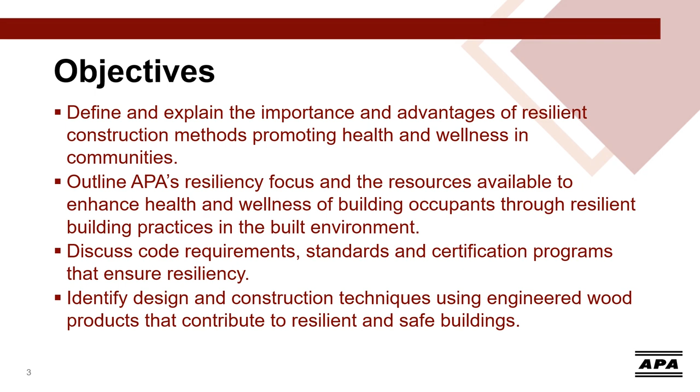So for today's objectives, we're going to be looking at defining and explaining the importance and advantages of resilient construction methods promoting health and wellness in communities. We're going to look at outline APA's resiliency focus. We're going to discuss code requirements, standards, and certification programs, and identify design and construction techniques using engineered wood products.

We're going to start with the why. Everyone knows today that extreme weather conditions in various parts of the world are the result of climate change and global warming. It's not just the number of heat waves, heavy rainfall, and major hurricanes that have increased in the world, but the strength and intensity of these events has increased considerably as well.

Architects, engineers, and builders are at the forefront of going beyond existing design practices. They are using innovative strategies to promote structural sustainability and safeguard occupants. Various strategies, such as utilizing durable and low-carbon materials, incorporating passive cooling techniques, and integrating nature-based solutions.

Investors are aligning their portfolios with sustainability goals. Resiliency includes energy efficiency, which the codes are mandating. In fact, energy efficiency is one of the top codes and the biggest priorities to incorporate into new homes.

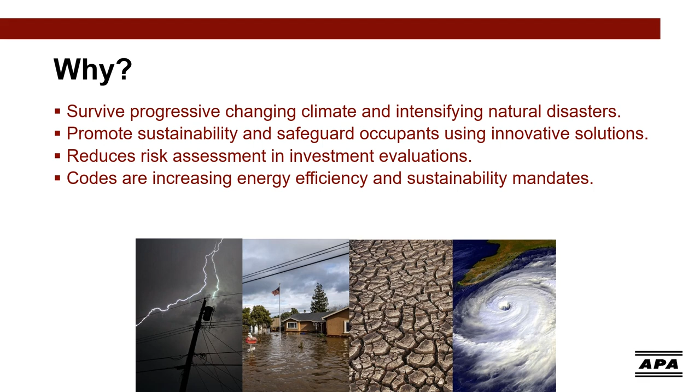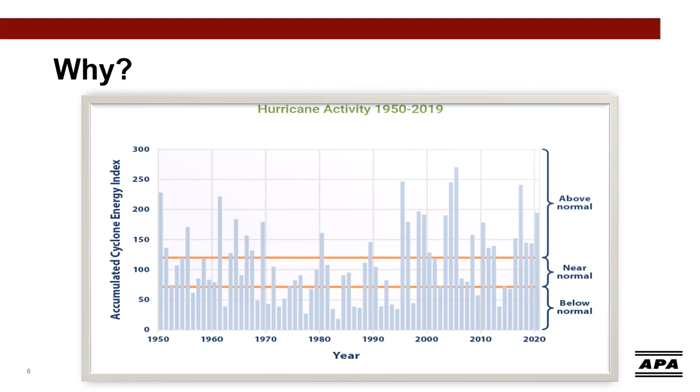Looking at hurricane strength and frequency over time, you can see that it has increased in strength and intensity since the mid-1990s. This is a pretty telling graph. It's very interesting.

So now that we've talked about the why of resiliency and why we're paying attention to it as APA, let's talk about APA's definition of resiliency.

So APA's definition of resiliency is the ability to design and construct buildings that can withstand and recover from severe wind events, seismic activities, fire, and floods while promoting sustainability and energy efficiency, utilizing engineered wood products. This is achieved through APA's 4 resiliency pillars: structural resilience, hazard mitigation, sustainability and stewardship, and energy efficiency.

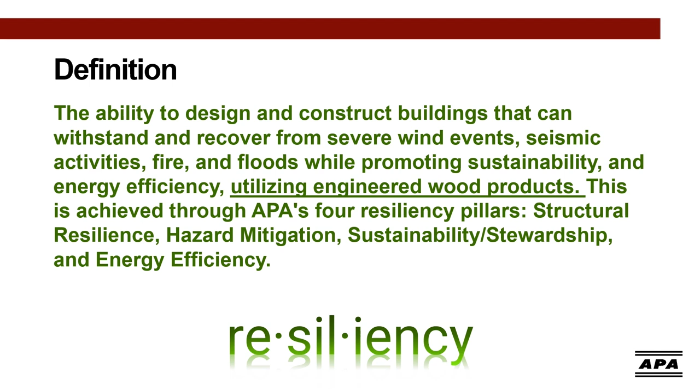Now that we've talked about the definition, we're going to move on to talking about the 4 key pillars that APA sees as part of our definition of resiliency.

So as communities worldwide have been struggling with the effects of climate change, resiliency is becoming more and more important and a more prominent topic when we talk about codes, code development, and building of buildings and homes. Our resiliency pillars include the following.

1, structural. Structural resiliency is very important. Hazard mitigation, making sure that the building can withstand fire and floods where appropriate. Sustainability and stewardship, making sure that we're doing sustainable items or putting sustainability policies in place for the built environment. And energy efficiency, a core piece of a solid resiliency plan to make sure the building is energy efficient and survivable after a major disaster.

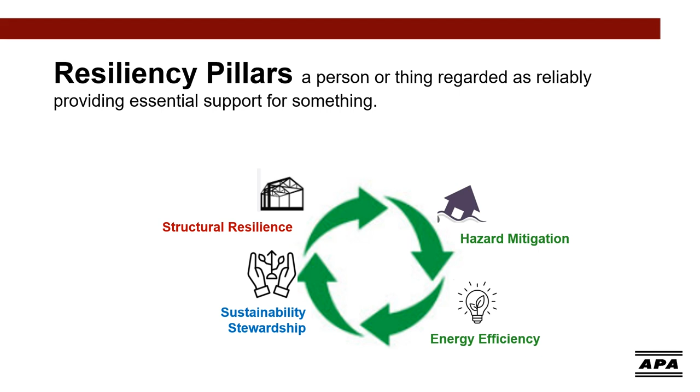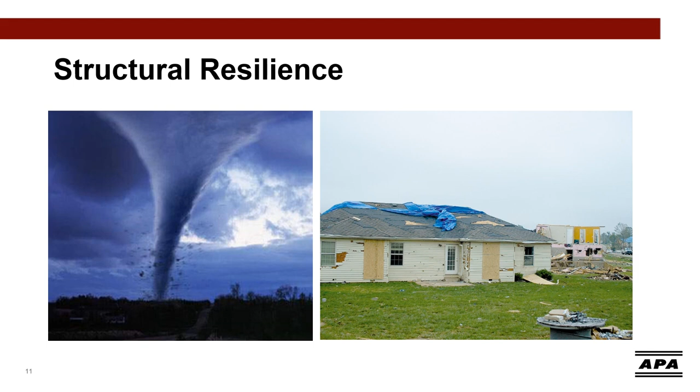So first today, we're going to talk about structural resilience and the importance of a structurally resilient structure during high wind and seismic events. So the key to structural resilience is promoting resilient, high-performing buildings that are capable of withstanding severe wind events. Seismic resilience is advocating for high-performance seismic design and construction of new homes and buildings.

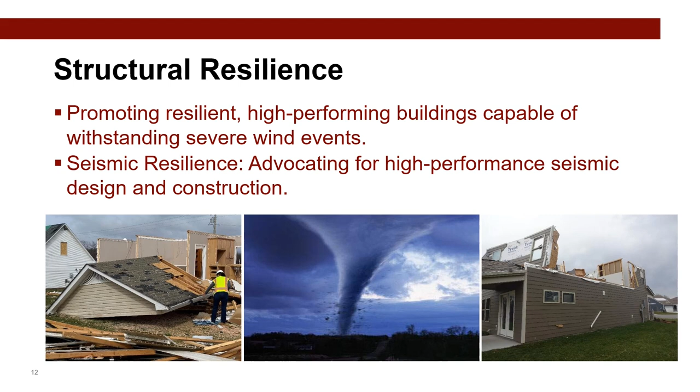So first, we're going to talk about high wind. And APA has several resources for this, and we'll talk more about them later on in APA's resources as well. But we have brace for high wind events and maximizing wall bracing using wood structural panels for continuously sheathed walls. And on the seismic side, we'll talk about wall bracing for seismic.

We're also going to talk about force transfer around openings. That's a solution that APA has for seismic. And weights of materials come into seismic design as well, where wood is typically a lighter construction product than some other competitive products on the market.

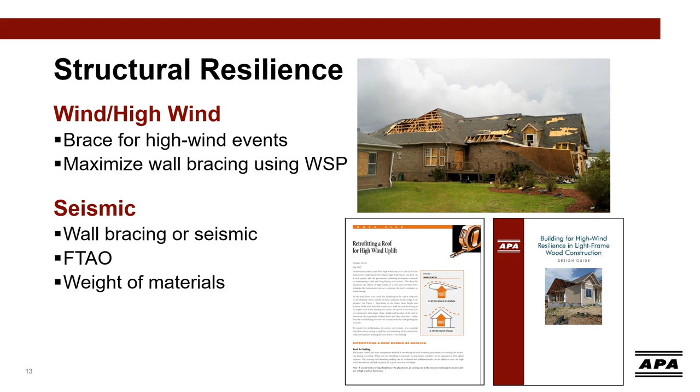We also see the importance of structural resiliency come up in different programs around the country. One of them is HUD, so they have some guidance for continuously sheathed homes in their community resilience toolkit, as well as HUD's resiliency guide for wind, which basically cites that a complete wrap of OSB or plywood, we call it wood structural panel in the industry, on the exterior, is recommended to make sure that you can withstand the wind pressures needed and design a more resilient structure.

The other program is Fortified. Fortified has different programs at different levels, but their gold program deals heavily with protection from wind, with fully sheathed homes and other methods that can be utilized to increase the resiliency of the building for high wind events.

So when we talk about hazard mitigation, we're going to talk about structural fire first. To be straightforward, AWC, the American Wood Council, takes the lead on structural and construction fire issues. APA references their resources. This is the way the wood industry and our partners utilize each other's expertise.

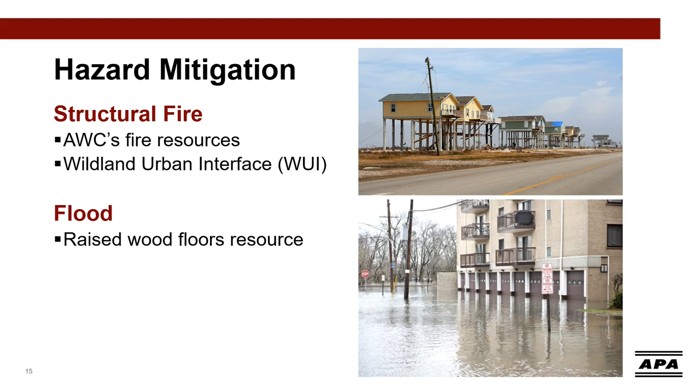Here are a couple resources from the American Wood Council on structural fire. You can go to constructionfiresafety.org, and it'll give you a 5-step best practices. They also produce the fire design specification for wood construction guide as well.

APA has several resources for flood and raised wood floors. In this case, a raised wood floor case study for Cooper Homes. You can also find the raised wood floor design guide that we have. It was a big promotion in the Southeast after hurricane damage and floods came through. Some foundations down there have flood dampers and stuff like that that allow the building to withstand floods in its direct area.

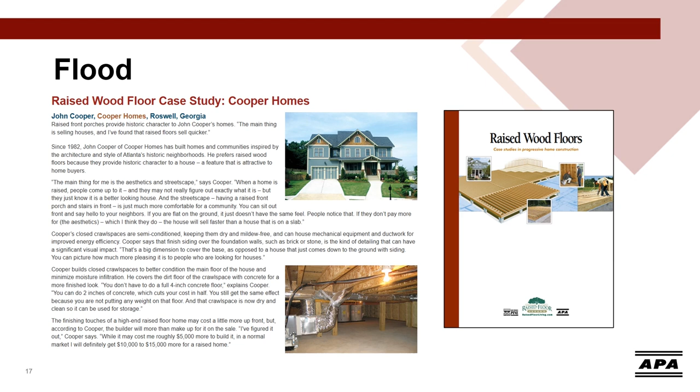Starting in the late 80s and early 90s, this movement towards sustainable structures began. Green building programs created a quantitative way to evaluate buildings' environmental impact and sustainability. Most recently, we've seen a shift in focus towards carbon accounting and the creation of Architecture 2030, the Carbon Leadership Forum, and SE 2050, all focused on decreasing carbon emissions. Now there's a high priority to develop resilient structures against hazards, but also to allow those structures to stay habitable when services are severed and occupants are still there.

Green verification reports are becoming more common. APA's green verification reports help building officials and design professionals determine a product's eligibility for points under different green programs. APA issues these reports to document the compliance of engineered wood products manufactured under a quality program audited by APA to specific international, national, or industry recognized green building standards.

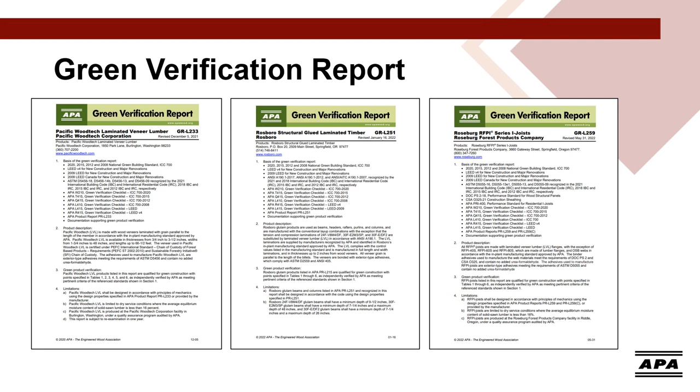Life cycle analysis, called LCAs, and environmental product declarations, called EPDs, are becoming more and more common and are becoming required in some areas of the country for construction. As we move forward and more attention is paid to sustainability, carbon, and embodied carbon, both from a codes perspective and a policy perspective, you'll see more discussion around LCAs and EPDs. The American Wood Council is charged with maintaining a database for EPDs and getting them online with LCAs as well. This information will be used in future programs in carbon accounting, as well as embodied carbon calculation programs that will be coming forth in the next several years.

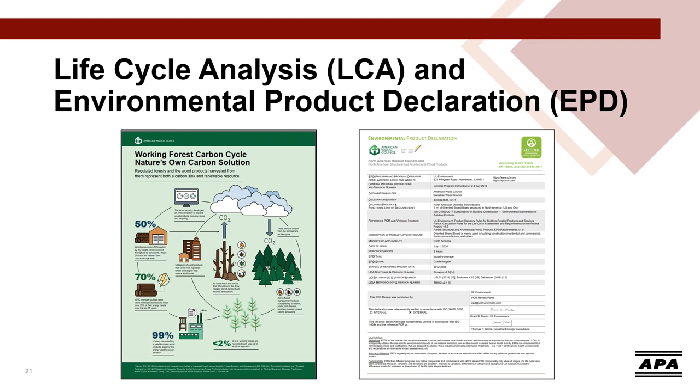Energy codes are becoming increasingly important in resilient structures. Part of it is we want to improve energy efficiency and support cost-effective updates to energy codes and policies. Another part is survivability and the ability to maintain livable temperatures for several days without energization to the house, electric, gas, or other means of producing energy. Another part is high energy performance, ensuring we have high energy performance in our structures today through well-insulated thermal envelopes that can support life and temperatures.

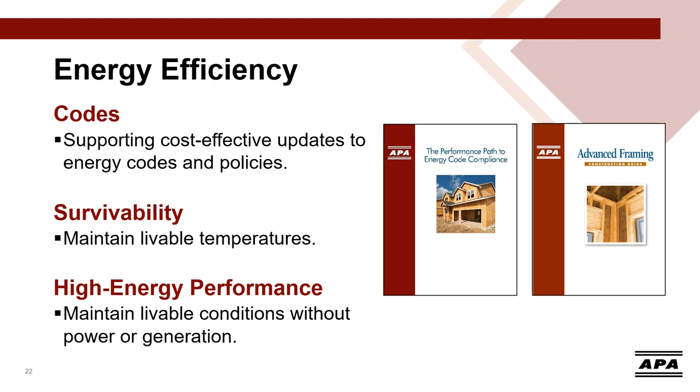APA has developed and is developing more resources on energy efficiency. APA's performance-based energy code publication, originally developed in 2016 and revised this year in 2024, is designed to be a guide to start conversations between builders, energy professionals, or designers about material and equipment options that can be utilized in the performance pathway of the energy codes. All homes have to be specifically modeled to that home design and site address, but it gives a starting point for discussions about if I change my walls, what's my impact on energy efficiency? Or if I want to put better windows in or a different heating system, what advantages might I see as the builder?

Performance-based energy code is essentially about looking at all the pieces of the home. Different from the prescriptive path that focuses on a set table of R values in the prescriptive code, it's kind of just a recipe. The performance path looks at putting insulation where it makes the most sense for your most value, and looking at other efficiencies within the home, whether it be windows, tight air leakage, tight HVAC equipment, high efficacy lighting. It takes the entire home as it sits into consideration versus just a checklist approach to energy efficiency.

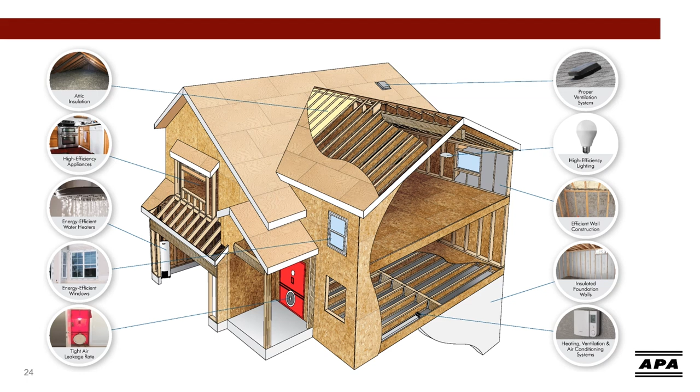Survivability is a big part of where the energy efficiency portion of resiliency comes from. Because as we've had more and more storm events, we've also had warmer weather or colder weather in some areas of the country due to climate change. And people need to be able to have survivability in their home for a few days without power generation or power to the home.

And there are several different programs that talk about the specificity of what that should be. ICC has some, DOE, Department of Energy, has some, but they talk about different survivability aspects. And one of the things that they look at is additional insulation, air sealing, preheating and cooling, and phase change materials as part of the product of survivability. We look at it from purely an energy efficiency standpoint and making sure that we have thermal comfort by having a well-insulated building thermal envelope.

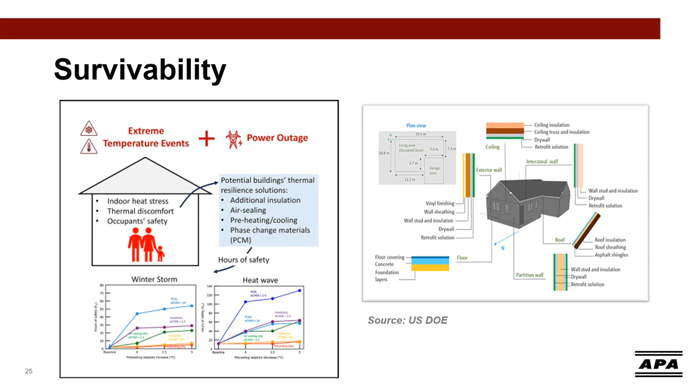And some of these programs have incentives for the builders. There are federal tax credits available currently of $2,500 per home for Energy Star version 3.2. There are also federal tax credits available of $5,000 per home for DOE's Net Zero Energy Ready Homes program. And there are multiple utility incentives and state programs, depending on your local state or utility, that vary anywhere from $200 to $2,800 per home. And some incentivize different insulation products, as well as different furnaces, thermostats, and HVAC equipment in general.

There are also rebate incentives to the homeowner through federal tax credits such as the Energy Efficiency Home Improvement Tax Credit and the Residential Clean Energy Tax Credit. There are multiple state utility incentives, state and local energy code adoption incentives as well, and other code and standards adoptions that are locally based that can provide rebates to the homeowner as well.

And with that, we finished up our resiliency pillars portion of today's presentation. And I'm now going to pass the presentation over to Stephanie Rees to talk about APA resources. We're now about halfway through, and we're going to change it up a little bit, and I'm going to be speaking to us. So if we look at the agenda, we're going to discuss the implementation of resilient methods in construction and how APA's resources can help accomplish this.

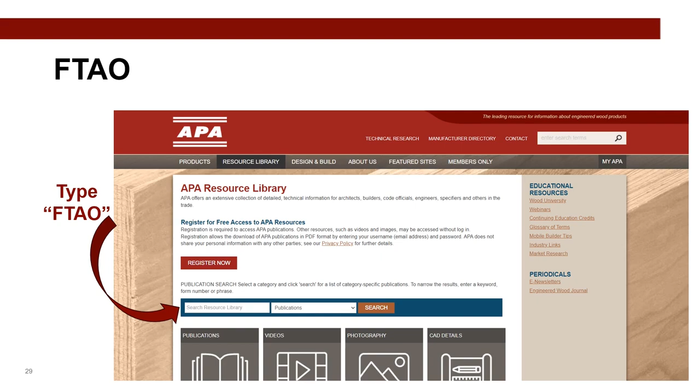Also, on our home page, in our Design and Build drop-down, under Design Solutions, you can find more resources about FTAO, like our calculator and a webinar about the calculator's use and explanation of the methodology for designing more flexibility in shear walls. As wood frame construction is continuously evolving, designers in many parts of the U.S. are optimizing resilient and sustainable design solutions that require the understanding of force transfer between elements in the lateral load resisting system. And using renewable sources like wood structural panels to accomplish these load path transfer options is a great way to meet sustainability goals.

Also, there are case studies and a YouTube video here that conducts an interview with a developer that explained how a 120-unit apartment building in California was value engineered and determined that a switch to I-joist compatible glulam, double-sided wood structural panel portal frames, and shear walls using the FTAO analysis got the project within budget while addressing the seismic loads.

And if I can just reiterate, like the case study shows, shear walls designed with force transfer around openings offer advantages compared to other types of shear wall design, like more flexibility, more versatility, because designing with the FTAO allows for the use of narrower wall segments while meeting the required height to width ratios, and a high likelihood that fewer hold downs will be required.

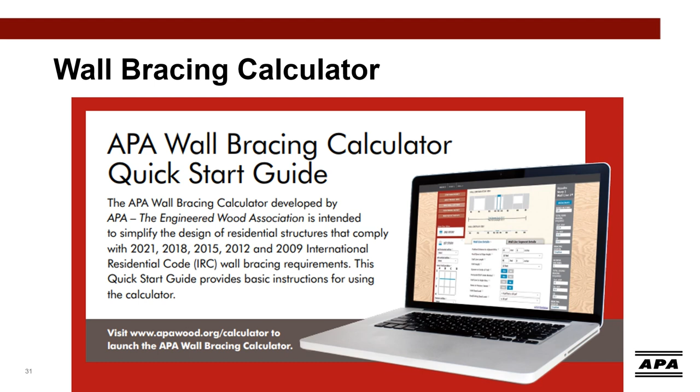Advanced framing method is another solution to incorporate resiliency in construction. Using continuous wood structural panel sheathing supported at 24 inches on center framing allows builders a cost-effective system that will produce more energy efficiency by allowing deeper wall cavities for insulation, and does not compromise the strength or durability of the structure. Less material and lower labor costs than conventionally framed homes, advanced framing techniques are more resource efficient.

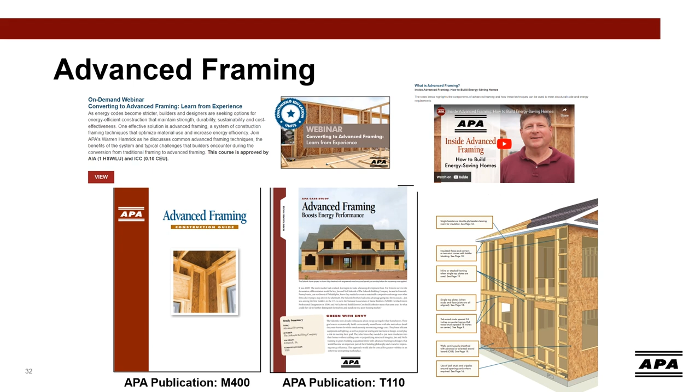APA has several publications, CAD details, case studies, and a webinar that discusses advanced framing techniques, the benefits, and challenges that builders encounter during the conversion from traditional framing to advanced framing. The left image is our advanced framing publication you can download from our website, and the picture on the right demonstrates how properly sizing and minimizing framing material is conserving cost and resources while aligning those framing members optimizes load path continuity and enhances structural integrity.

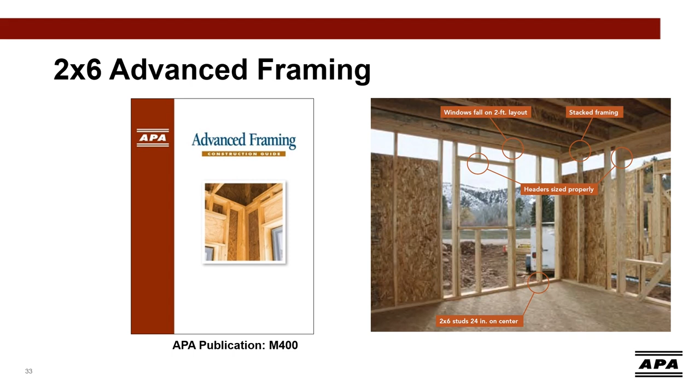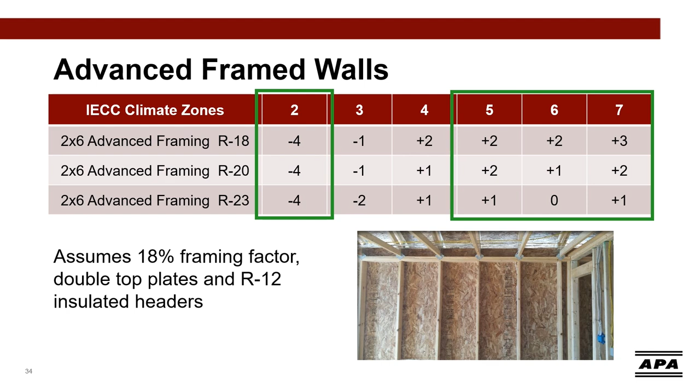Over a 10 to 13 year period, APA followed storms and created individual storm reports that looked at the storm's damage and noted the patterns in those failures. We then identified those common first failure points and determined a threshold that we would base and develop our Building for High-Wind Resilience in Light-Frame Wood Construction Guide. Now, this guide creates a framework to improve overall performance in the structural shell and focuses on good connection details to tie together exterior walls, roofs, and floors.

We also have a webinar that follows the load path described and shows many of those failure points from each storm and how they should be mitigated either through strengthening or just simply proper installation of what was specified.

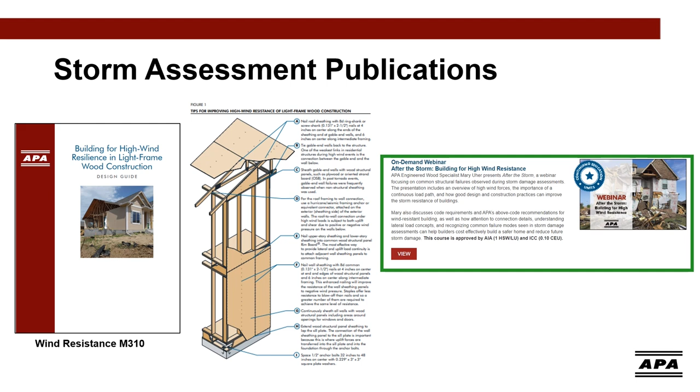The idea that less is more is a sustainable way of construction that can help reduce our environmental impact by conserving resources, using light frame engineered wood products that are generally more straight, further reducing waste, using mass timber like glulam and cross-laminated timber, or CLT, in lieu of concrete and steel that tends to be more labor and carbon intensive.

Biophilic design can improve human well-being by creating healthy, inspiring environments. Exposing the structure when the program allows for it reduces unnecessary materials and highlights the raw structure, and in some cases can become a learning tool. And again, using advanced framing technique meets sustainability goals.

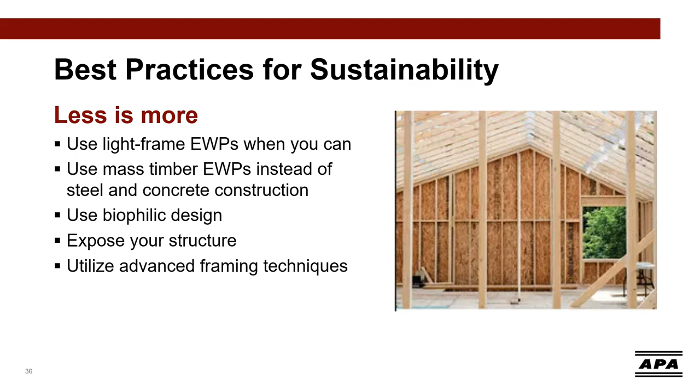I mentioned the case study already, but here's two buildings, one 4 stories over 1 and the other 2 stories over 1, that utilize wood podium rather than a traditional concrete podium. Again, these case studies highlight the following benefits like fewer trades on site, less mobilization time, fewer construction delays, improved framing efficiency, easier field modifications, decreased mass for lateral design, etc. Again, less materials from an embodied carbon superior material equals a sustainability win for projects like these.

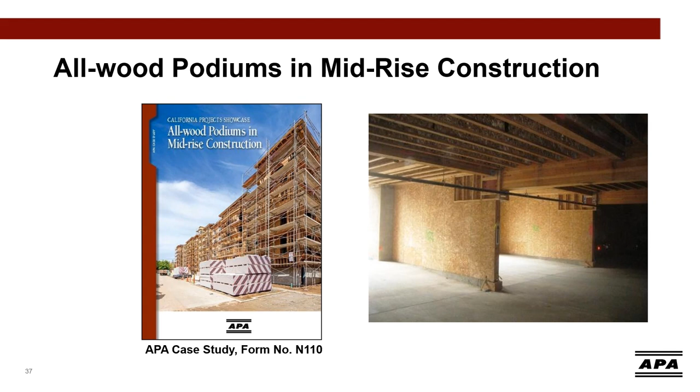The use of mass timber for taller buildings has had a large foothold in Europe and Canada for some time. The intersection of lower embodied energy and renewable resources propels the mass timber industry forward. As discussed, timber buildings store carbon in their structure for the life of the building. So an 18-story mass timber building, for example, has a negative carbon imprint equal to taking 2,350 cars off the road per year.

According to the contractor of this building, the Ascent Tower in Milwaukee, Wisconsin, while mass timber materials are not inexpensive, they do offer several cost-competitive advantages and long-term benefits, like the columns, beams, and panels on average weigh 1/5 the weight of concrete and steel materials, reducing shipping costs and requiring a smaller workforce to install. Prefabricated panels delivered directly to the job site allowed construction time to be reduced by approximately 25%, further saving owners more time and money. And again, the biophilic effect that wood structures have on people, like increasing occupants' overall health and wellness. All this gives long-term value to the design.

And with the 2021 IBC code change, the U.S. allows up to 18-story tall wood buildings. Here pictured are two examples, an 18-story student housing project in British Columbia and that 25-story apartment building in Milwaukee that I mentioned earlier.

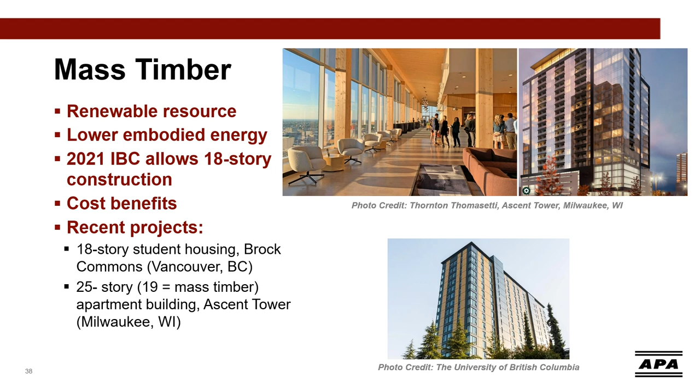This is probably one of my favorite designs to date. We mentioned biophilic design and how it connects people and nature within our built environment and communities, and can help reduce a building's carbon footprint by using natural elements like plants, water features, and natural materials like wood. This is the Cathedral of Christ the Light in Oakland, California, and it uses biophilic design, natural materials, natural light, and the use of patterns to enhance the new structure that was a replacement for the previous cathedral that was rendered unusable following the 1989 Loma Prieta earthquake. The project leaders designed this new structure with resilience in mind and a design life of 300 years. Imagine the life cycle analysis and biogenic carbon that can be credited to this building.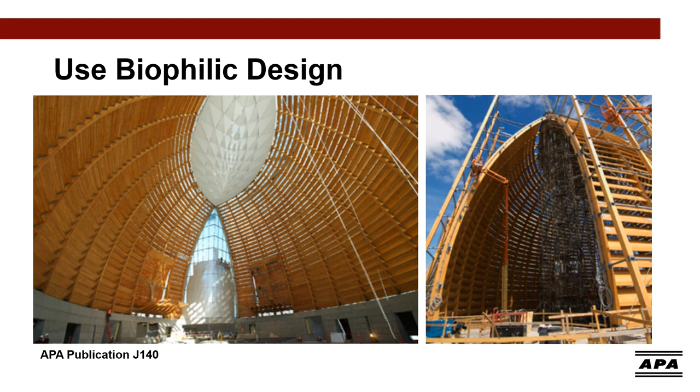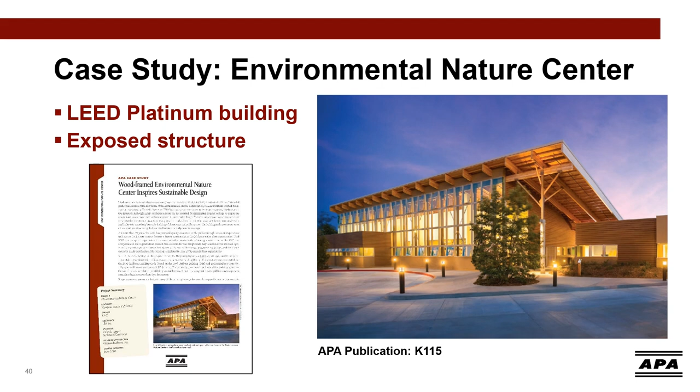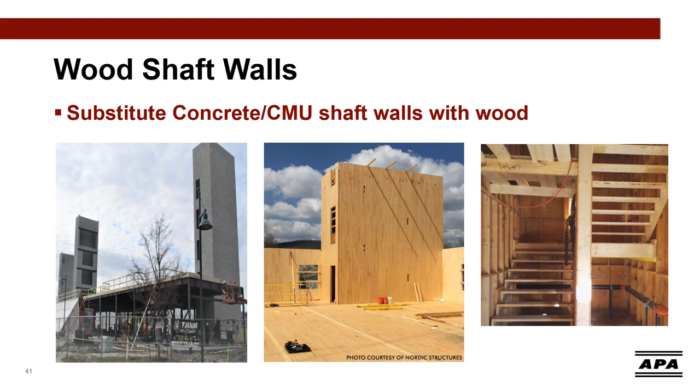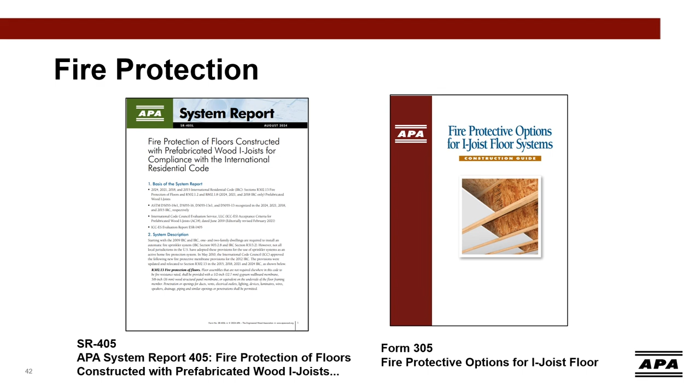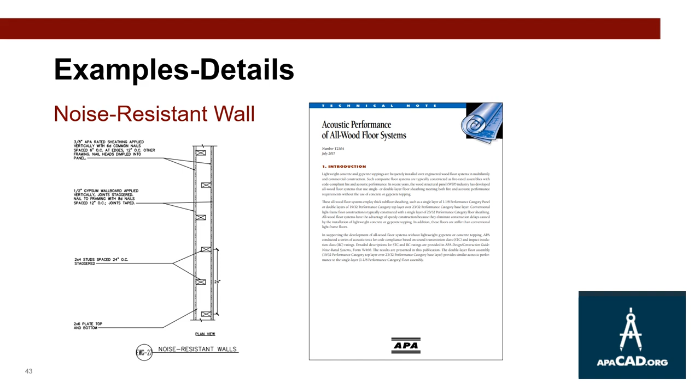Now we'll go through some examples of good and bad resilient methods, some successful strategies and some not so successful. All this to debunk the myth that there is a one-size-fits-all construction type. Rather, I like to say it should be right material, right place, right installation.

Resilient wood construction should resist wind, weather, seismic forces, and moisture. Wood is a resilient choice for construction. Its strength, combined with its ability to absorb stresses or impacts without weakening or degrading, makes wood a superior building material, especially in areas susceptible to severe weather conditions or seismic activity. While regionalized building codes address the necessary design requirements, APA provides additional resources detailing construction practices that help those structures perform even better against hurricanes, high winds, severe moisture, and earthquakes.

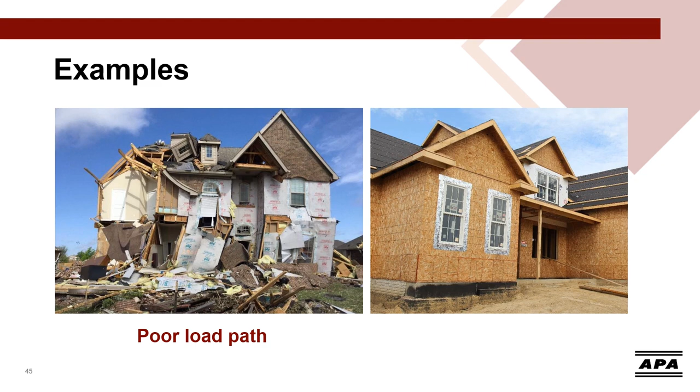This picture shows a side-by-side example of a house that has intermittent wood sheathing in lieu of continuously sheathed. On the left-hand side is rigid insulation, and on the right hand is wood structural panel. This was from an EF2 tornado in Missouri.

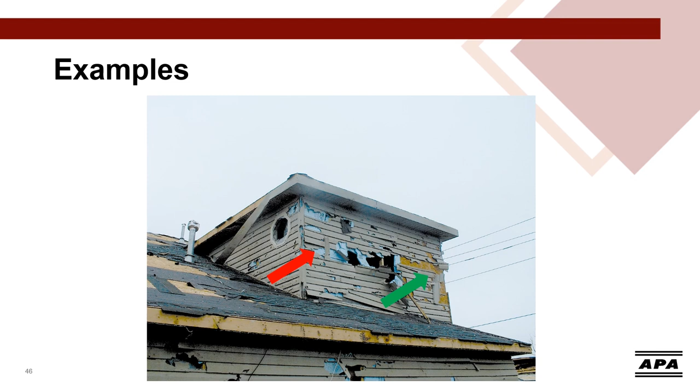That publication is Building for High Wind Resistance in Light Frame Wood Construction, and details like this help those common failure points perform more optimally.

It's critical for roof sheathing to be fastened properly in areas susceptible to high wind or tornadoes, especially at common failure points during storms, like at the gable end walls that are not braced, and at the rim connection between the top plate and the gable end stud going from the rim to the roof peak.

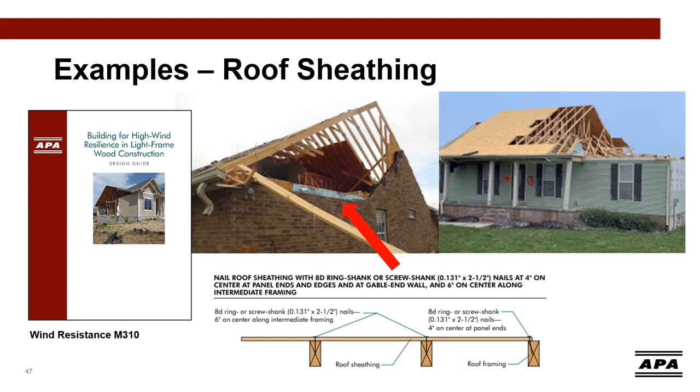Non-shear walls and gable end walls that are not sheathed with continuous wood panels can fail in high winds from the positive wind load normal to the wall. This removal can cause significant negative pressure that causes a domino effect of building deconstruction, loss of roof, wall cladding, etc.

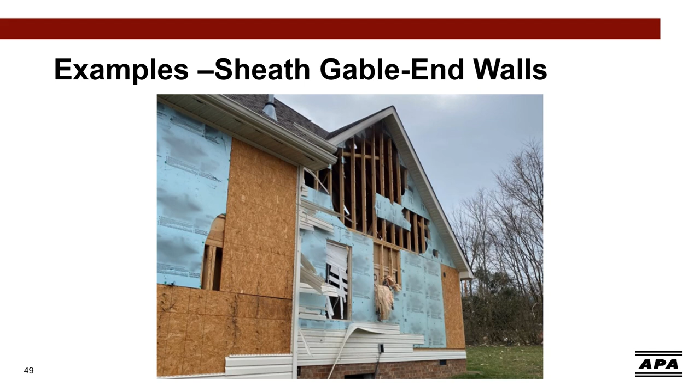Oftentimes, the top piece of sheathing is only fastened to the upper top plate, and the wall sheathing from below is fastened to the lower top plate. That uplift resistance is relying solely on the connection of the two plates. And when uplift does occur, the vertically driven fasteners do not have much resistance due to that inline grain.

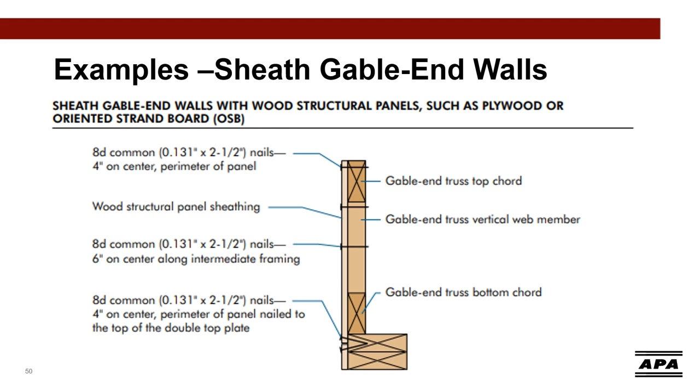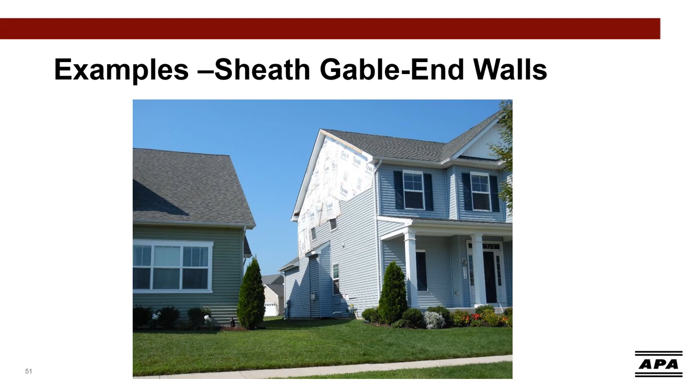Air barrier as a material, or materials assembled and joined together, provides a barrier to air leakage through the building envelope. It can be a single material or a combination of materials, and its intent is to restrict unintentional flow of air through a building envelope.

Another advantage of wood structural panel as an air barrier is it provides a rigid, continuous base for the vapor retarder to be fastened to. And while under construction, it's not flapping in the wind or susceptible to tearing.

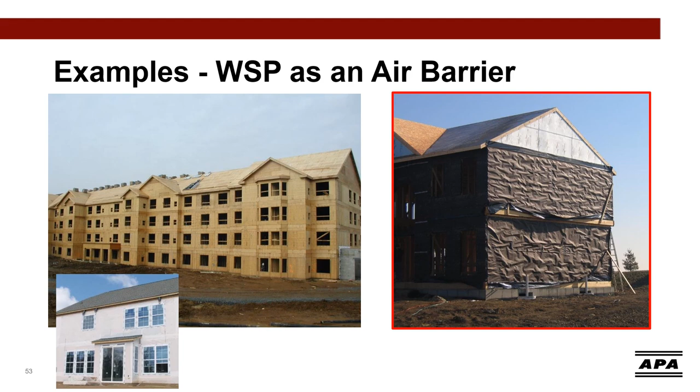Global warming from climate change means more evaporation and more moisture in the atmosphere, which means rainfall is intensified. Intense rainfall and changing landscapes make for more disastrous floods. In response to increased hazards and lessons learned from recent storms, regulatory requirements for construction in coastal areas have increased over the past decade. The way humans have developed natural landscapes, both inland and along rivers and coasts, means more rainwater remains unchecked and unabsorbed at the surface, turning life-giving rains into devastating floods.

APA has guidance for constructing flood-resilient structures by using raised wood floor systems. A raised wood floor system is an assembly of beams and girders, floor joists, and plywood or oriented strand board floor sheathing, all properly sized, connected together, and placed on a foundation. Here's a publication, Form K110, that gives some examples of flood-resistant construction with wood frame.

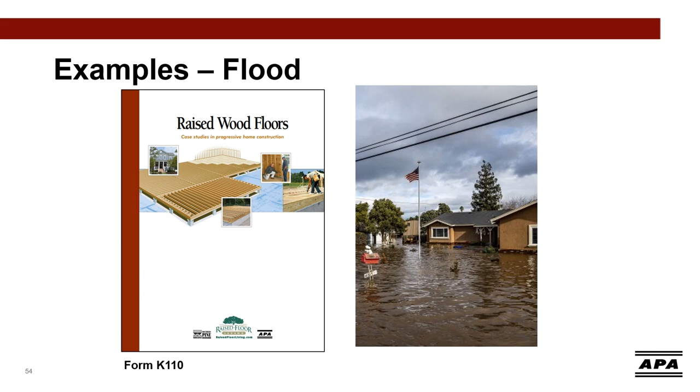Other reasons to build raised wood floors: it costs less to build than slab-on-grade, which can require additional fill to be brought in, and ensuring quality fill is utilized is a challenge in some areas. Raised wood floors also help accommodate the scheduling of trades. For example, concrete masonry work does not have to wait on plumbing installation and inspections, which is typically the case with slab foundations. A raised wood floor system provides a practical and affordable solution for meeting code and keeping a home above floodwaters.

Installation, maintenance, and modification of utilities such as water, sewer, and electrical is easy and economical compared to slab systems. Routing and rerouting of wiring for electrical, phone, television, and home entertainment is more quickly accomplished. And renovating or relocating plumbing fixtures is relatively easy and less expensive with raised wood floor systems.

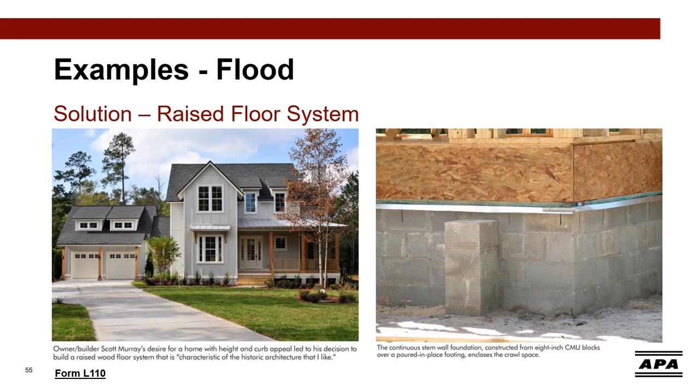Constructing a pier and beam or a pile foundation, builders contend, is faster regardless of the weather. A builder has several options for constructing piers when building a pier and beam foundation. The piers can rest on spot footings or a continuous footing. The placement and spacing of those footings and the piers is determined by the location of load-bearing walls and the span capabilities of the floor joists.

In stem wall foundations, a continuous foundation wall around the perimeter of the home is frequently constructed of reinforced masonry or poured concrete, supported by a continuous reinforced concrete footing.

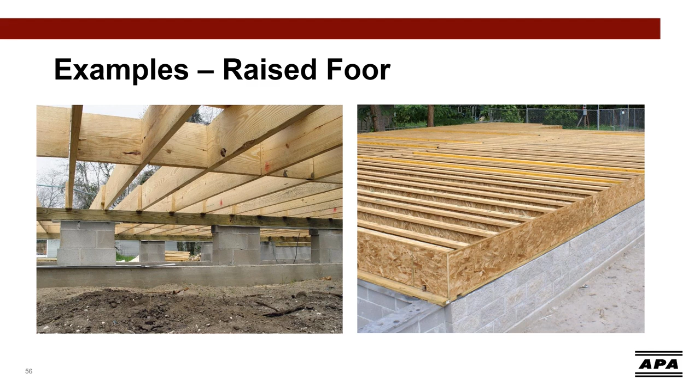Soil types can pose a challenge when constructing slab-on-grade. Expansive clays can crack conventional concrete slabs, and while many foundations can settle, the use of piers with a raised wood floor system makes leveling or repair simple. Repairing or leveling a cracked, damaged concrete slab can be very expensive.

Treated wood piles and wood piers minimize or eliminate the use of concrete altogether. They're popular in coastal areas for acquiring necessary height, but can also be cost-effective for raising floors just a few feet. Piles are often used in soils with low bearing capacity.

For sloped lots, a raised wood floor on piers is more economical and practical than building a cut and fill slab foundation. Less soil is disturbed, reducing erosion, and the piers eliminate the need for reinforced retaining walls.

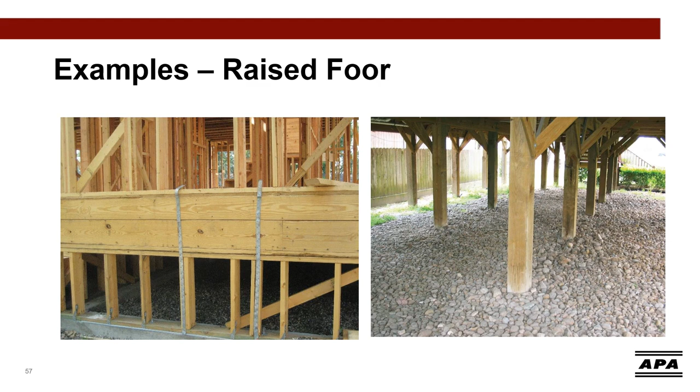With flooding, raised floors is a consideration, and FEMA has published a coastal construction manual that addresses this issue. It details different construction techniques where the first floor is raised above the design flood elevation, which is based on the base flood elevation as regulated by NFIP.

Engineered wood products are one popular design option that can include SCL or glulam pile caps and I-joists along with wood structural panel wall sheathing.

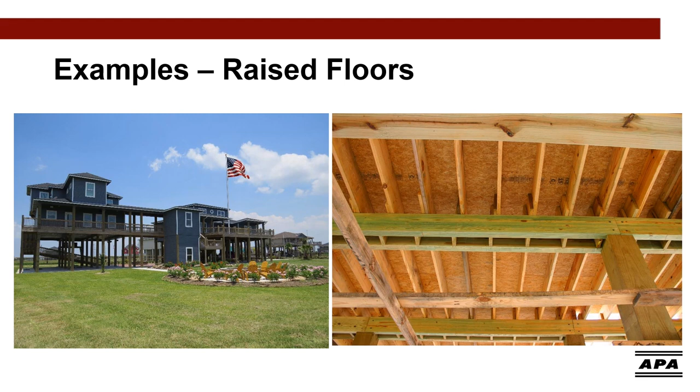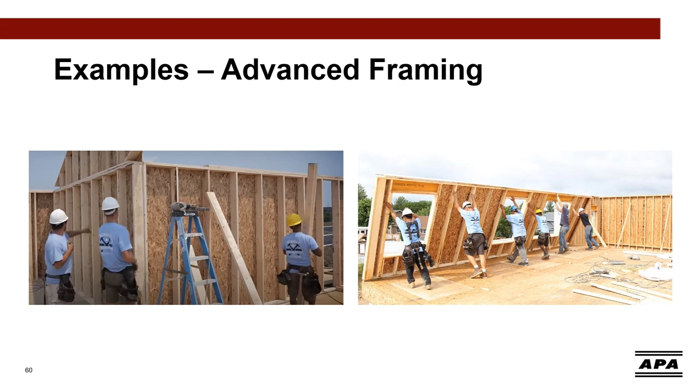Conventional three-stud corners, pictured here on the left, isolate uninsulated space in the wall. Advanced framing uses strategies like California corners and ladder blocking. Ladder blocking is used at the intersection of interior walls and eliminates the inaccessible, uninsulated cavities at the structural headers, and it's right-sized to create insulated cavity intersections.

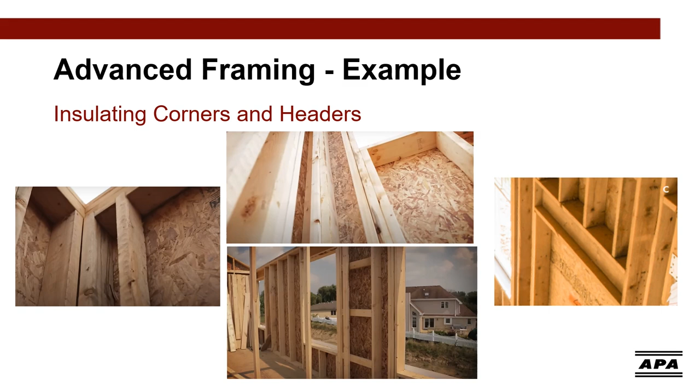However, sometimes without proper communication to the trades, all savings realized from advanced framing can be negated by excessive and unnecessary cripple studs, as you see here.

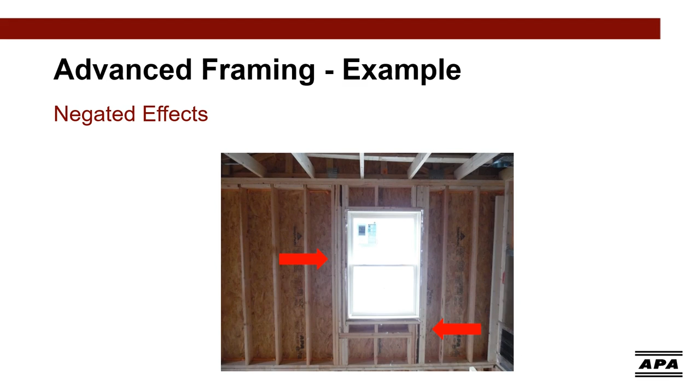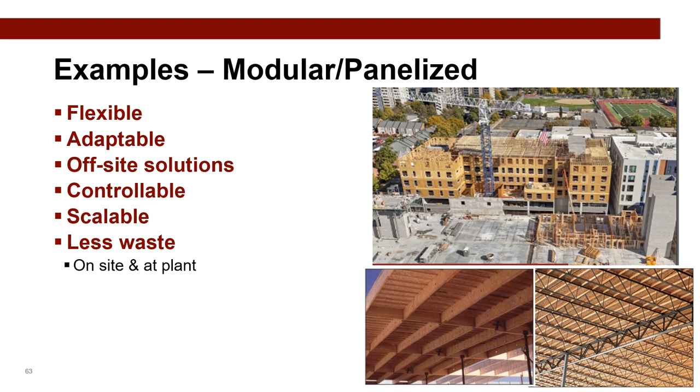And finally, in our last item of the agenda, we're looking at APA and our resiliency goals moving forward. APA, like many organizations, is making resiliency a priority and incorporating goals that provide solutions in achieving sustainability, energy efficiency, and durability against natural disasters when using engineered wood products.

We want to be at the forefront of changes and trends, especially within the IRC-IBC and IECC framework—creating buildings that can withstand, adapt to, and quickly recover from various natural and human-made hazards such as extreme weather events, earthquakes, flooding, high wind events, and power outages. The goal is to use engineered wood products to support ensuring safety, functionality, and longevity of structures, and as climate change intensifies and urban centers grow, making it an essential component of future-proof construction.

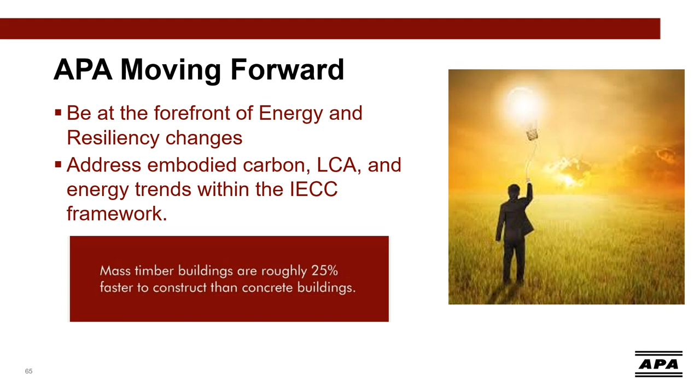Our APA headquarters is a state-of-the-art laboratory for testing members' products to meet standards and to explore new ways for members to manufacture products for resiliency. This lab has a 40-foot high bay with a 4-foot thick reinforced strong floor, 10 strong wall blocks with anchors, twin 5-ton cranes, and equipment to accommodate full-scale structural assembly testing.

It's built with LVL studs and purlins and glulam columns supporting curved glulam beams. It serves as a demonstration itself of wood's strength and resiliency. This is located at our headquarters in Tacoma, Washington, and is where the future of innovative engineered wood products helps promulgate our commitment to the built environment that prioritizes resiliency without compromising human health or safety.

And with that, and looking at the time, I want to turn it back over to Bob for any questions that we might be able to answer with the remaining time. Thank you.